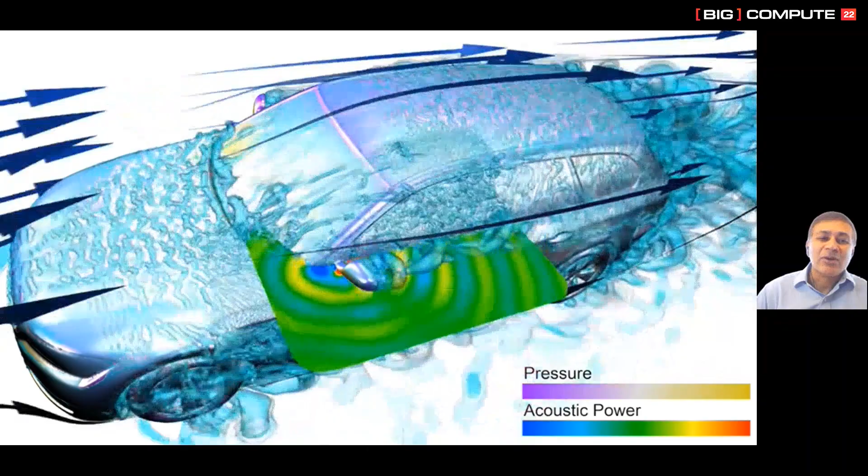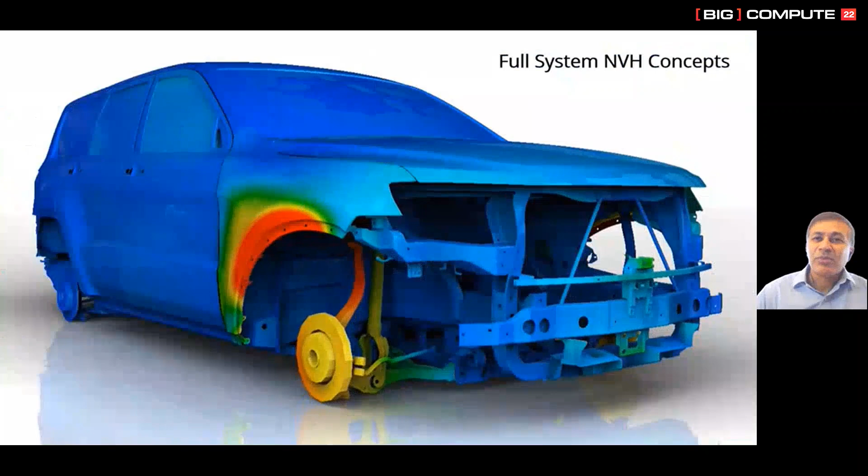Most organizations have already embarked on a journey where they are using CAE for designing their products and making sure those products will function well as intended, meaning from a product durability or performance point of view. They often incorporate multiple complex physics into their simulations. It could be fluids and acoustics, as you see in this case. It could be noise, vibration, and harshness assessments, as you see over here, or thermal fluid flow assessments for thermal runaway avoidance simulations in electric vehicle batteries.

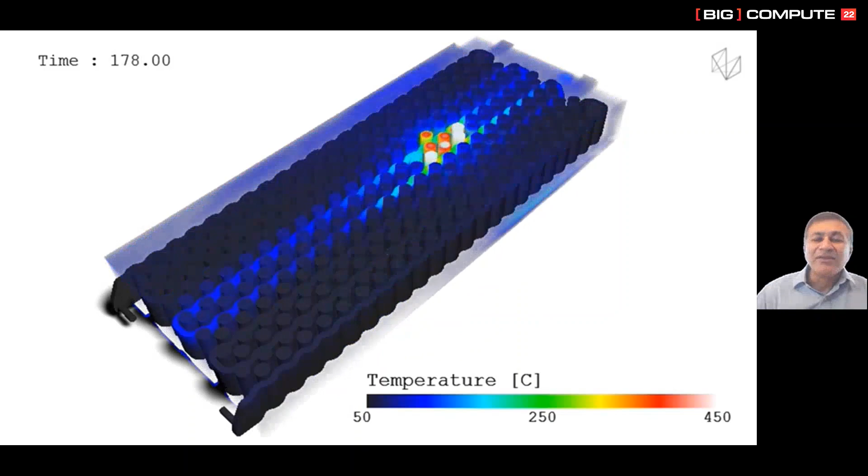I'm sure you're already familiar with many applications of CAE that help people imagine and design better products. In that sense, CAE has come a long way and has had, and is continuing to help develop much better products.

We've also been quite successful in taking advantage of modern computing capabilities and high-performance computing so that we can solve even more challenging problems that might require more sophisticated modeling. This might simply be large models or longer duration events or adding more physics. In this example, this problem involves about 230 million elements and almost 200,000 cores.

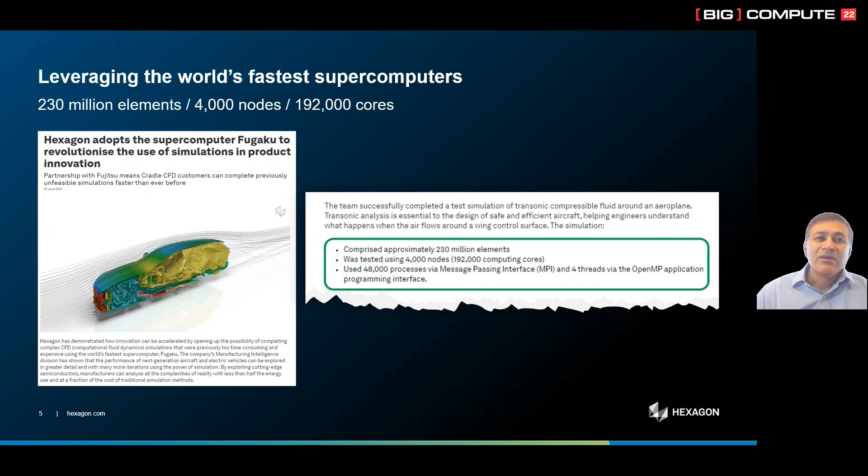In this next example shown here, you can see the speed up we are able to get by leveraging GPUs in this case. So about a 5x speed up in this acoustic application. So pretty good overall, I would say.

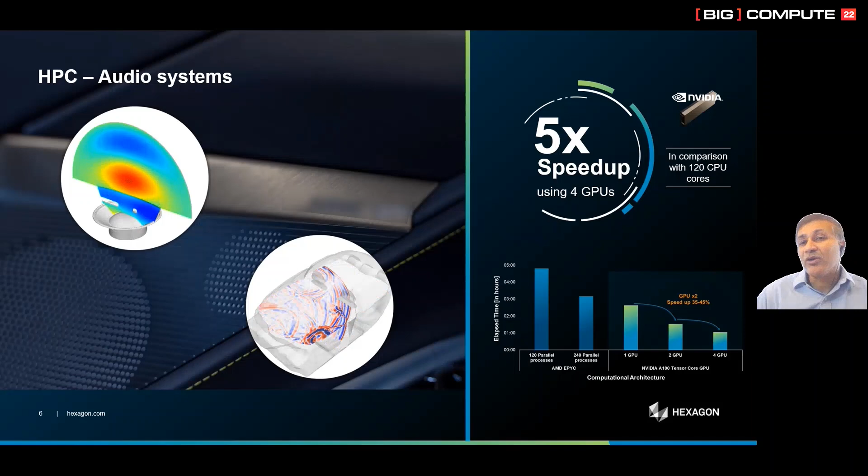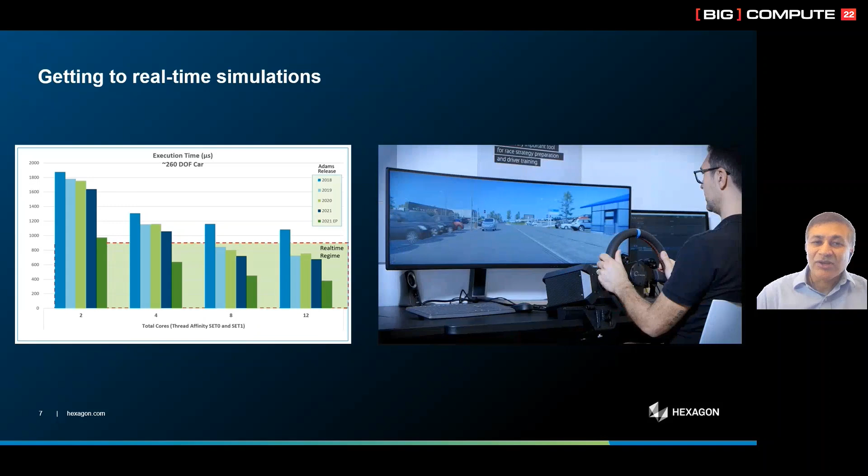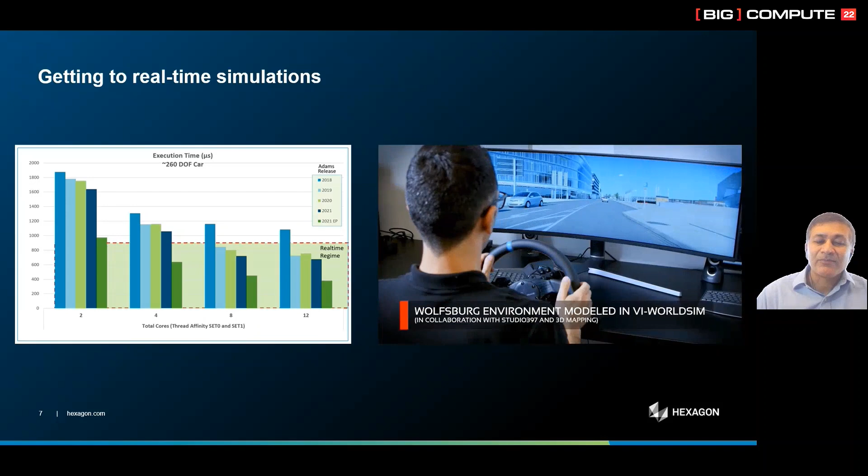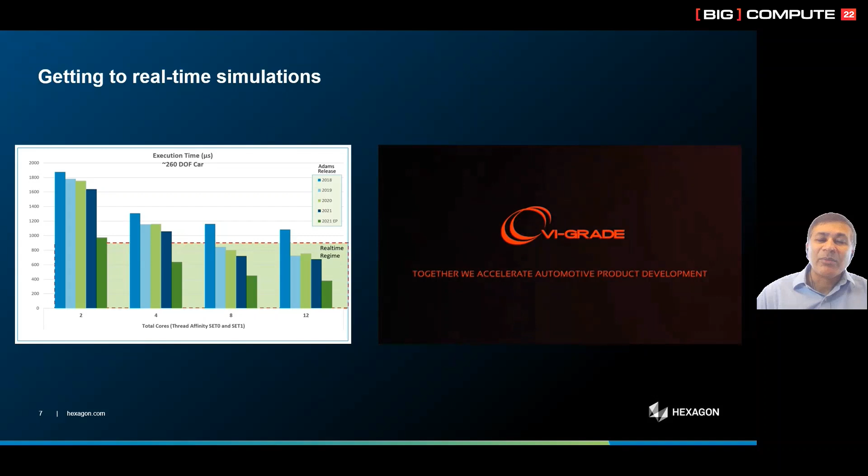In fact, we have reached a point where we can take advantage of modern computational algorithms and implementation schemes to get to real-time simulations, where accurate physics-based models can provide real-time guidance on how a product or system is going to behave. This enables the use of simulation-based models within various machines. And this is a point I will come back to in a bit, especially in the context of manufacturing. In this example, you're seeing Adams RT multi-body simulations being used within a driving simulator in a realistic driving environment to evaluate ride handling and comfort.

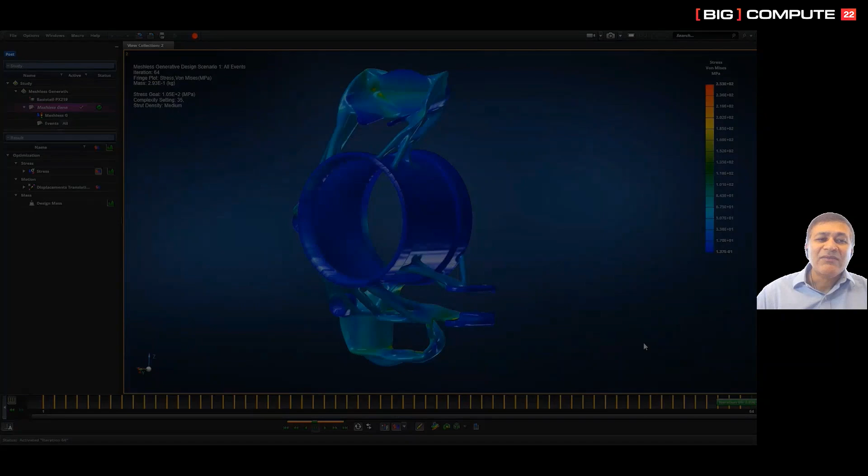More recently, we have seen widespread adoption of generative design concepts to help develop designs that may not be intuitive, but can be really effective in meeting functional and other criteria, such as weight reduction. And even in this case, we've been able to take advantage of modern processors to significantly reduce design iteration times.

So the point is that CAE has been very useful in helping various companies and multiple industries develop far better designs, make better choices on everything from material selection to deciding what performance characteristics matter most, and basically help come up with better products. And we are able to do all of that faster and much more efficiently thanks to high-performance computing. In the future, you'll continue to see improvements here and for us to obtain greater value from simulations with the adoption of techniques such as AI ML to improve the product development and product design processes.

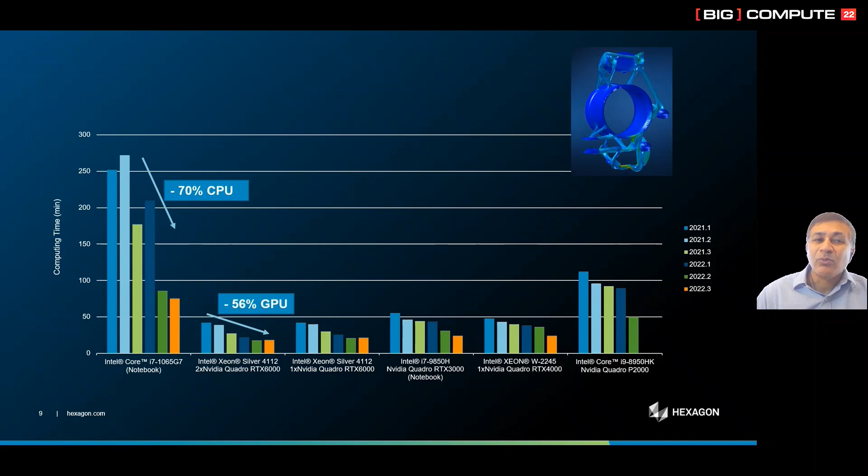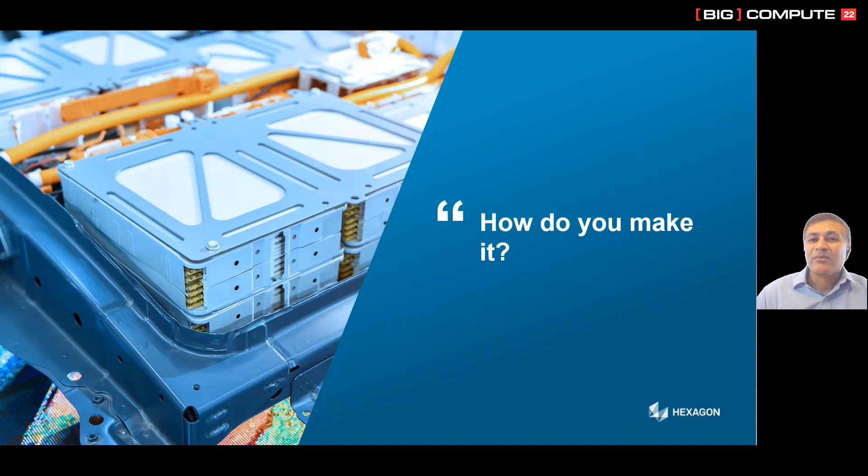What I'd like to do now is pivot to a different topic. What can you do when you have to leverage CAE even more and come up with a much better application of CAE once you have a great design? Can we do more with simulations? Basically, can we answer questions such as what you see on the slide? Can you make the product that you thought you wanted to make? How do you make it? Can you make it fast enough? Can you make it within budget? Can you make it with the quality expected?

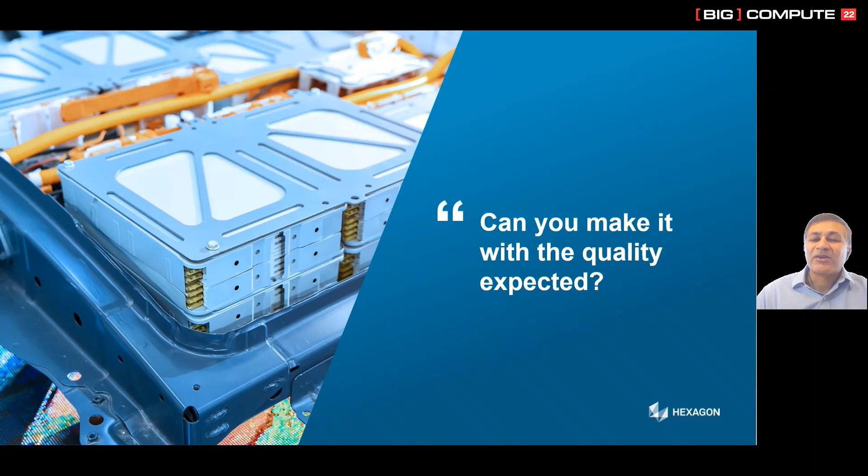How can you be confident that the products as designed can actually be made to address all of the product requirements? Now, it could be performance, life, or other characteristics, as well as meet other business requirements like cost, quality, and sustainability. How confident are you that you're making progress towards zero prototyping?

These questions require us to go beyond concepts like design for manufacturing and requires us to take advantage of simulations beyond the traditional product design and development space and into the manufacturing space. The essential idea is that our software and other simulation software already help design products that will function well as intended, whether it's life or performance. But we don't need to stop there, and we shouldn't stop there.

We can help select and evaluate the best manufacturing sequences appropriate for a given product. It could be forming, cutting, welding, additive manufacturing, etc., a lot of which we can simulate with our software today. But we can go beyond that to tie together much more closely design and engineering, production, and metrology by leveraging paradigms such as AI, cloud, data integration, and workflow management.

For example, once you have confidence that products can be made properly, because you've evaluated it via virtual manufacturing simulations, we can then continue the journey by providing simulation-based guidance during the actual manufacturing to adjust process parameters, such as speed, temperatures, and so on, on the fly based on measurements so that the products still come out as intended, or to flag situations where manufacturing needs to be stopped for corrections.

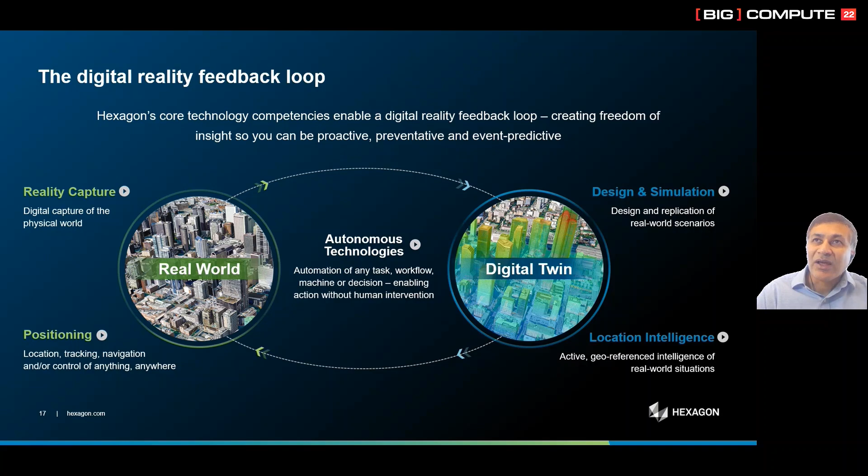Now, in order to realize this promise and potential, there is one key piece that needs to be considered: measuring what's happening in the real world, and not just living in the simulation or the virtual world. This connection in both directions between the real and the digital worlds is essential to realize the promise of smart manufacturing, and is at the center of what we do at Hexagon, not only for manufacturing, but to provide autonomous systems in various application areas, and to realize what we call smart digital realities.

So what are smart digital realities? Smart digital realities are real-time 3D digital worlds that are data-rich and autonomously intelligent. They're made possible by integrating sensor and software systems that connect customers on a one-on-one basis in a precise manner to 3D replicas of physical workplaces, objects, and processes.

Smart digital reality is what allows us to move industry beyond automation to autonomy, providing the ability for systems to act independent of human interaction. So smart manufacturing is a manifestation of the smart digital reality when it's applied to the manufacturing space.

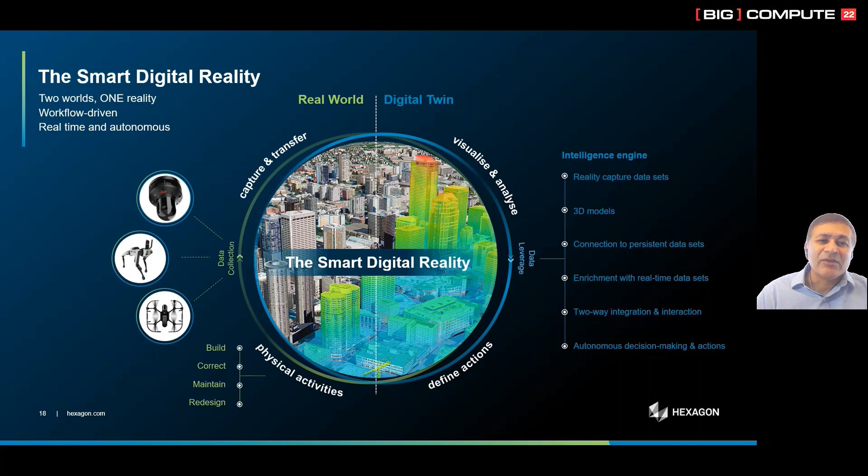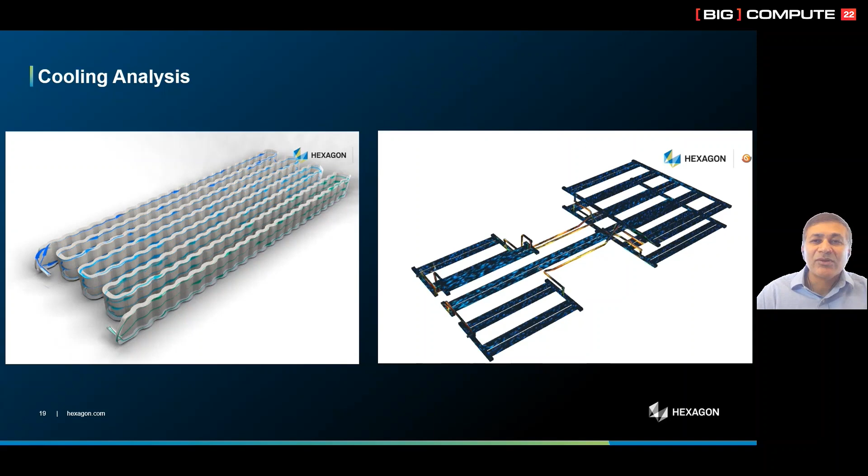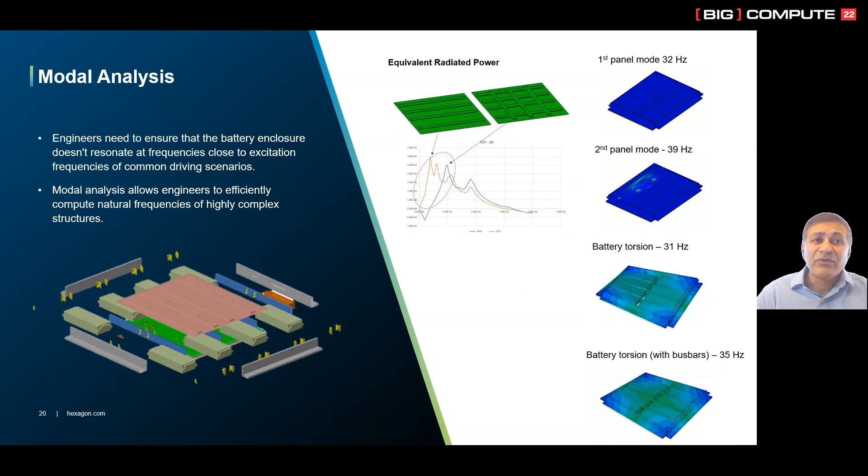Let's take a quick look at what all of this means using some examples. Consider the design and manufacturing of electric vehicle batteries. First of all, as we discussed at the beginning, we already can use simulations to design better batteries. These could be for battery cooling systems, as you see on the slide, or for modal analysis to prevent structural or other noise-related challenges, or for fatigue analysis and assessments to ensure adequate life of the product, and so on.

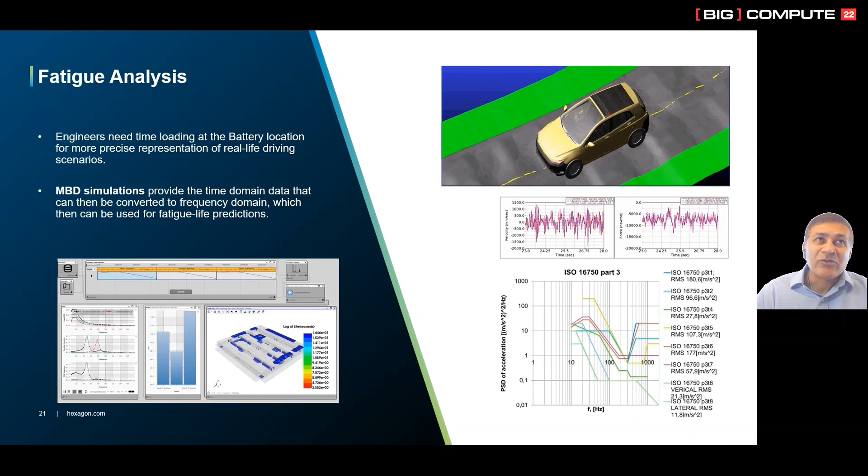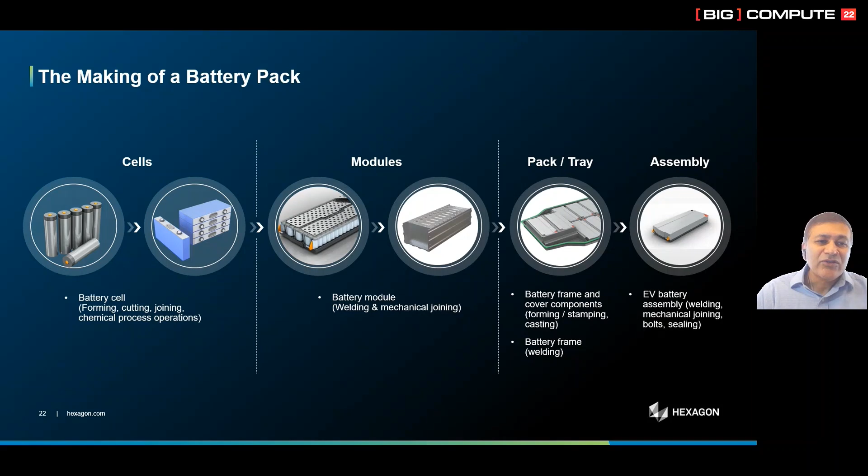We can also assess how to make various parts of an EV battery and how they're going to come together. So in the case of a battery pack, the battery is composed of cells, modules, and of course it requires a battery pack and a tray that are assembled together. So in addition to making these individual parts of the EV battery pack, you can see in this short video that we also need to consider assembly.

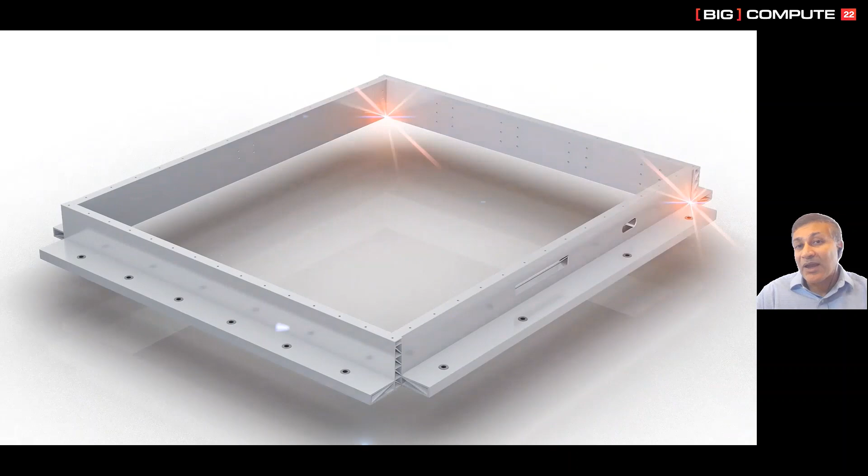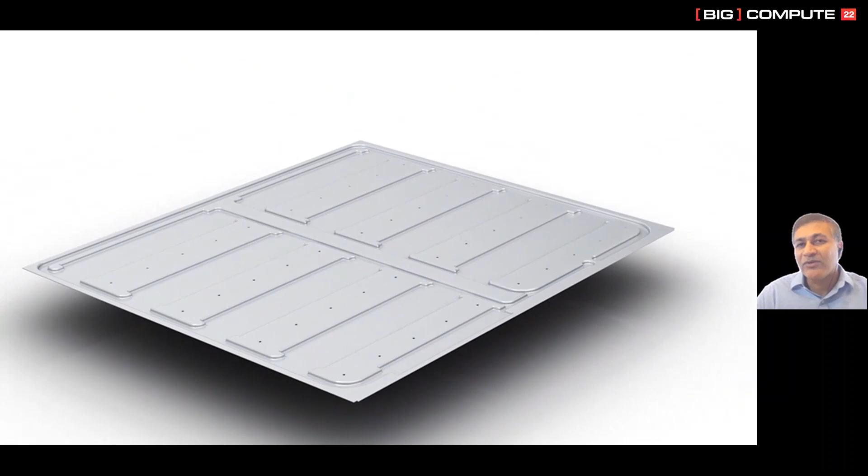That involves various types of mechanical fastening, gluing, welding, and other types of connection mechanisms. So I'll just let the video play for a few more seconds so that you get a sense of how many different types of connections and assembly mechanisms are used in the assembly of an electric vehicle battery pack.

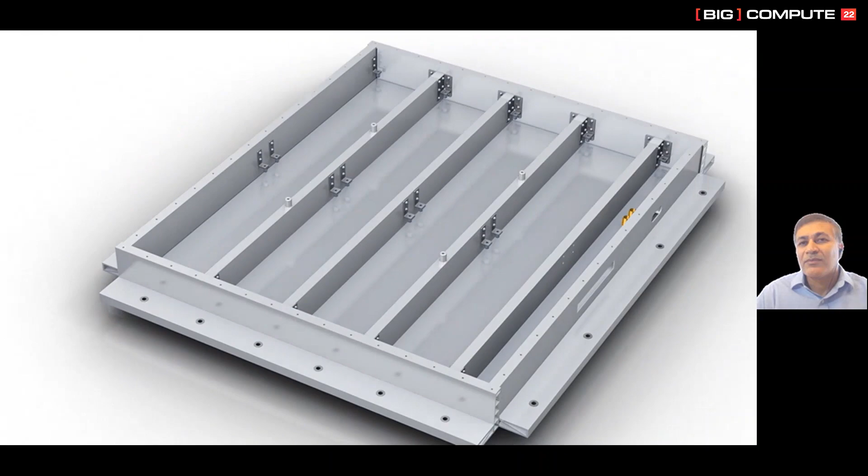So that takes us into the world of virtual manufacturing, where we are able to simulate in detail how various parts of the battery would be manufactured, and which methods are used, and what the process parameters would be to ensure that the final product quality would be good.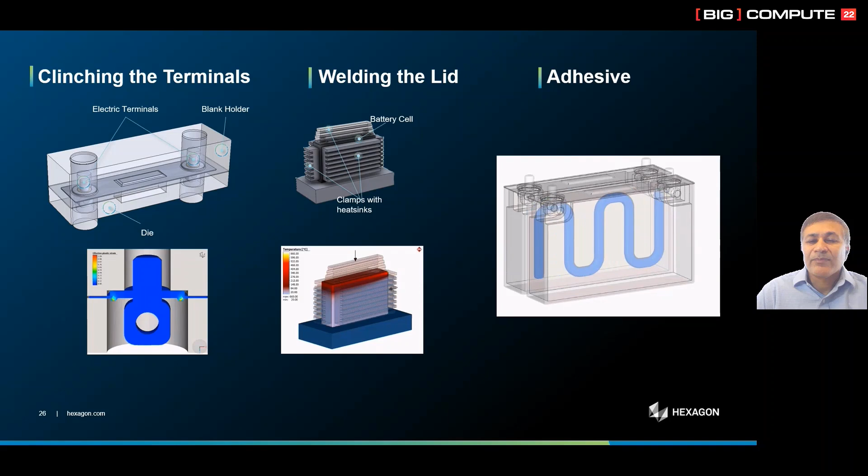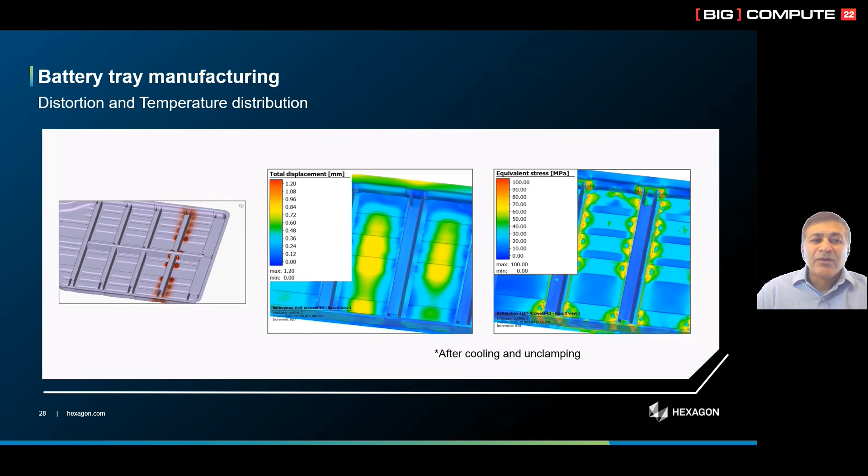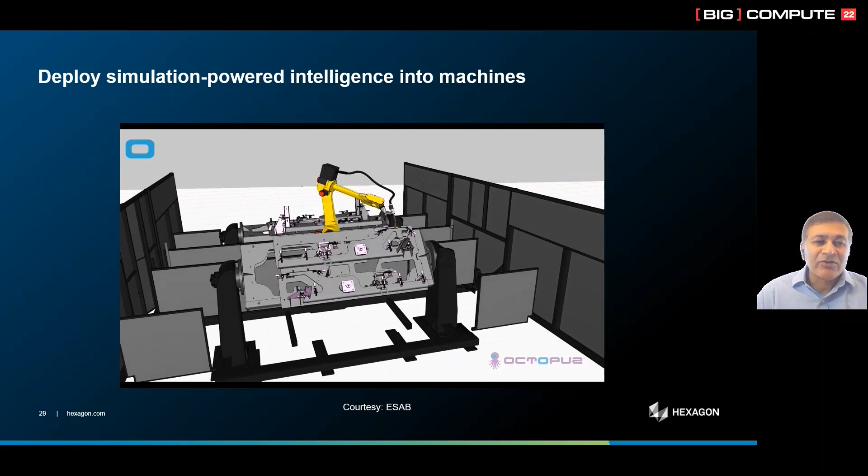Now let's move from the virtual world to the real world. In the virtual world, as we have seen, we can use simulations to design the battery and its various parts, and we've also used simulation to virtually manufacture the various parts to assemble it.

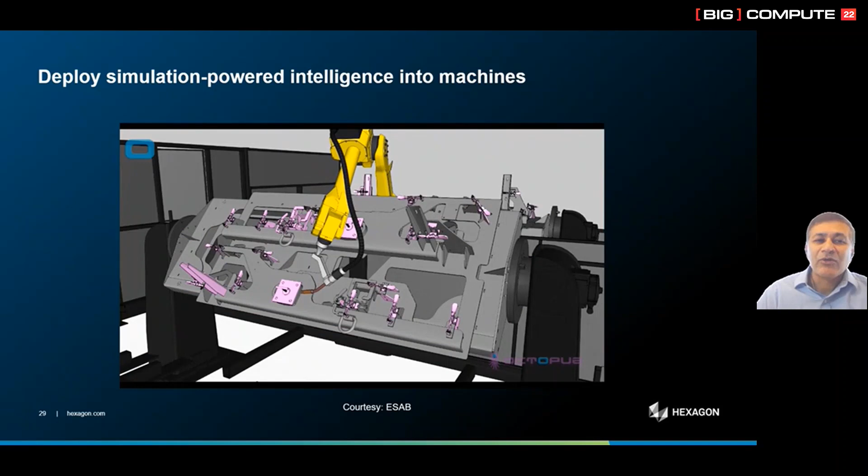Now, what does that mean in the real world? This is where things get really exciting. We can take the process parameters for welding, for example, from simulations—could be weld speed, temperatures, and so on—and use that information to program modern automated robotic welding machines, such as the one you see here from ESAB.

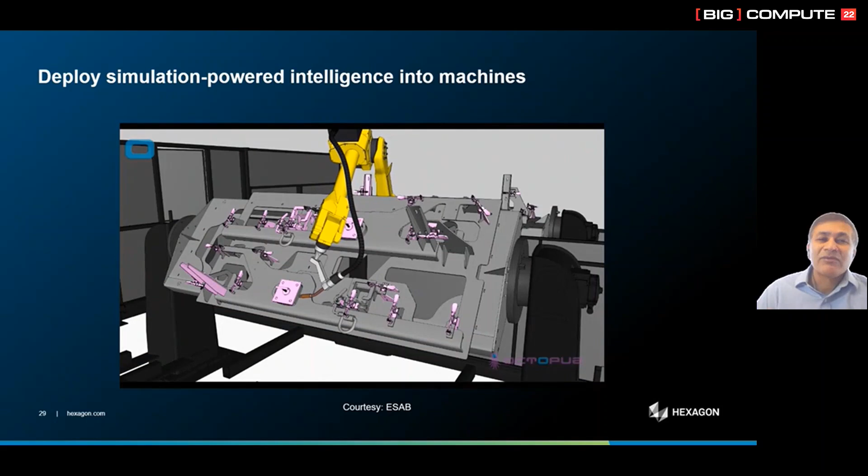Not only that, we can embed simulation-powered intelligence derived via AI/ML techniques into the machines so that if process parameters differ from ideal conditions—for example, if parts or fixtures are warped or if the torches are bent—the machine can still make adjustments autonomously, which is a big step forward towards smart manufacturing.

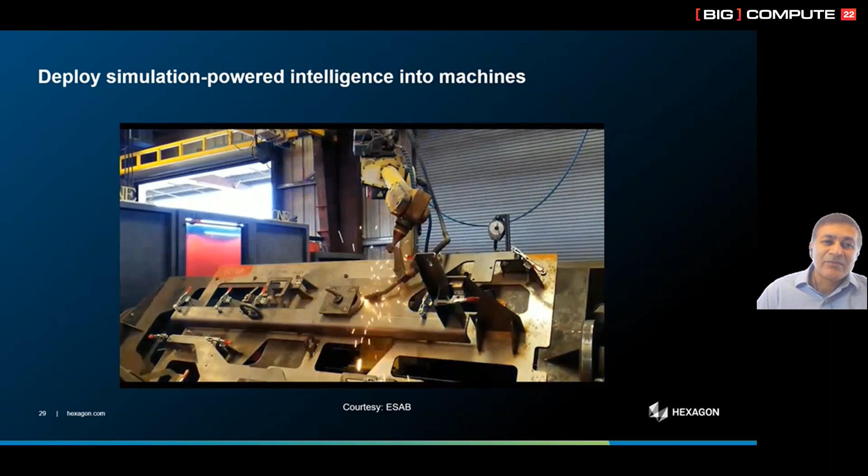In some EV batteries, there are hundreds of cells per module and over several thousand cells in many modules. That results in tens of thousands of welds in the assembly. So even at 99.9% or higher weld quality, safety and range could be compromised.

So welds must be studied and tested for higher quality in production. In other words, both precision in manufacturing and precision in inspections are paramount. So in the real world, as manufacturing is proceeding, we still need to measure what is being manufactured so that adjustments can be made as soon as possible.

Are the dimensions correct? Are there microstructural defects? Is delamination happening? And so on.

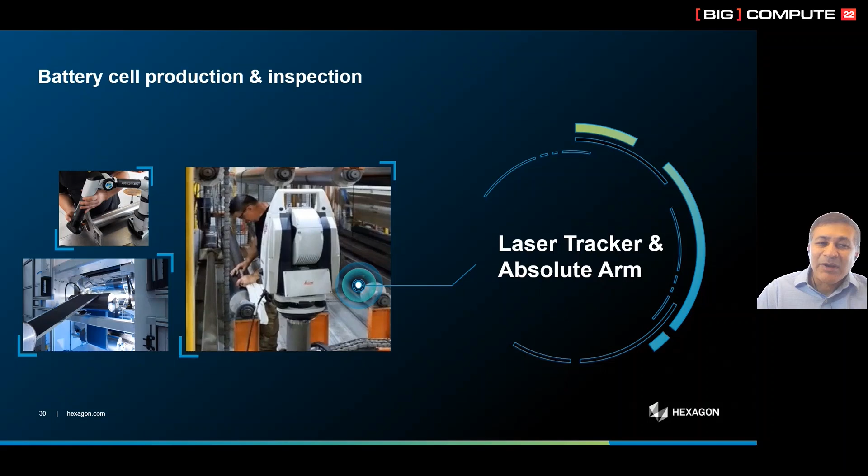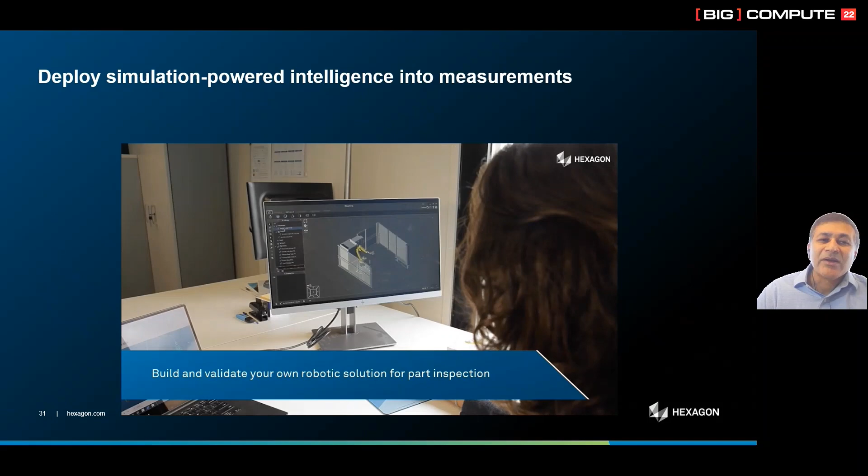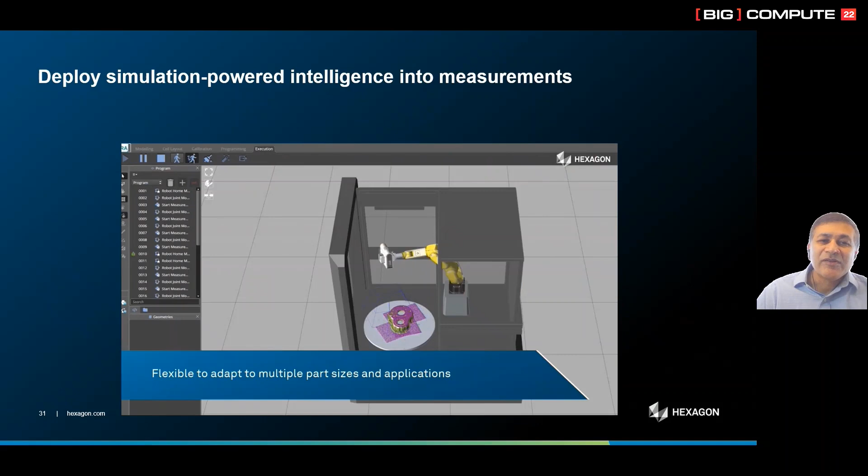And just as we saw with the welding machines, here again simulation can play a valuable role by providing guidance into what are the most important quantities that need to be measured, where they need to be measured, and how often. Measurement routines can be planned based on geometry, but also based on guidance from simulations so that the scanning routines can be optimized.

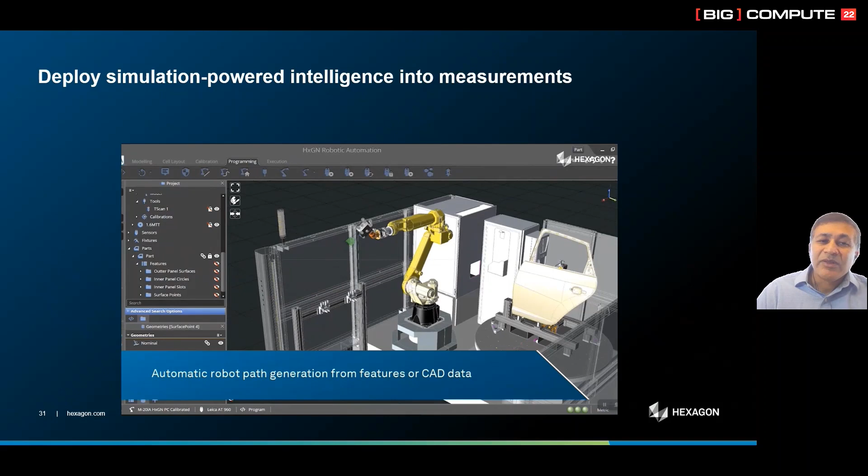Finally, the output from these measurements can be compared to nominal quantities for key decisions to be made. Let's take some more examples of what measurements can tell us about the quality of battery parts as they're being made. This is an example of optical measurements of wrinkles in pouch cells.

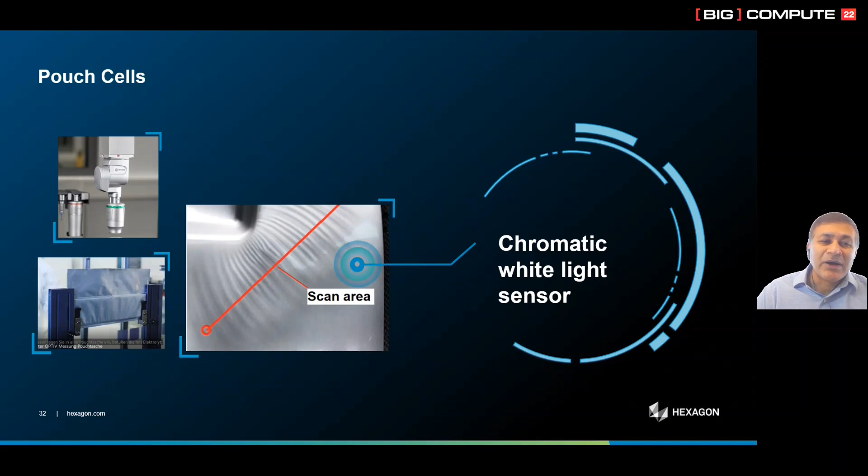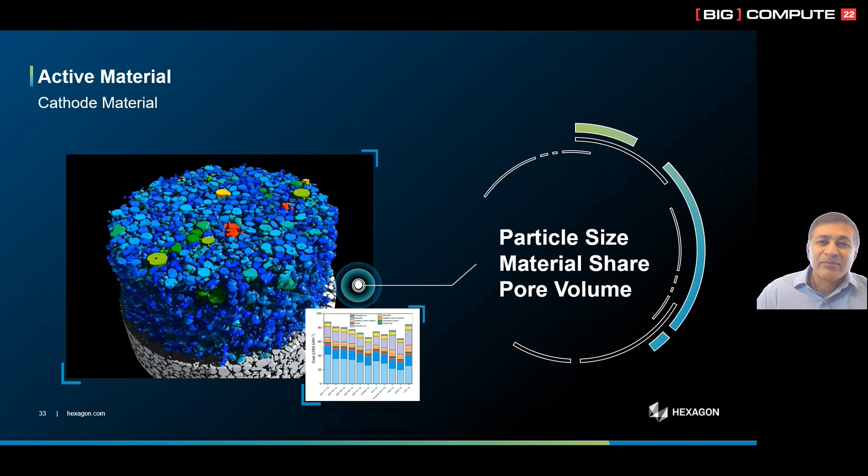Switching to CT scans, we're able to look inside some of the battery parts, such as the cathode, for porosity, particle size, and other details. Or we could look at inclusions in a jelly roll, delamination, porosity effects, and so on.

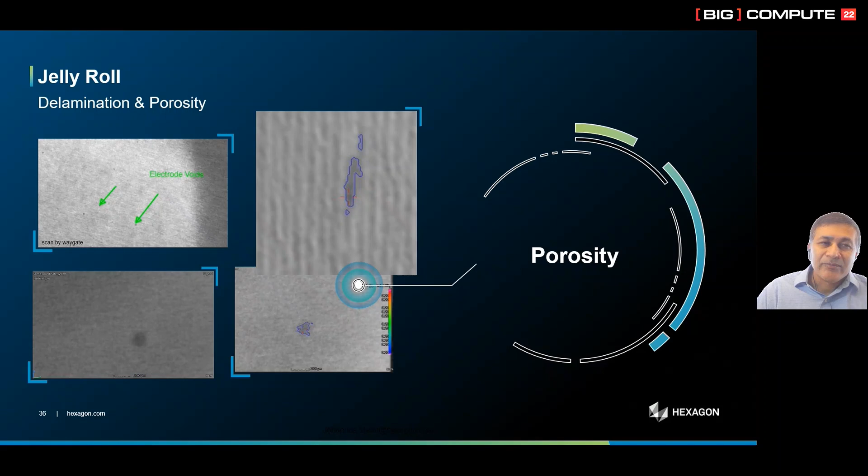So what do we do with these measurements in the real world? This could be dimensional measurements or microstructural measurements or other characteristics. Well, first of all, wherever possible, we could use those measurements—if they're happening during manufacturing—to adjust the manufacturing process parameters, guided again by simulation-based intelligence so that product quality is not compromised.

We can also use those measurements to understand the behavior of the as-manufactured product for reality-based simulations, but of course also for other analytical assessments using various quality and statistical methods applied to numerous measurements being made.

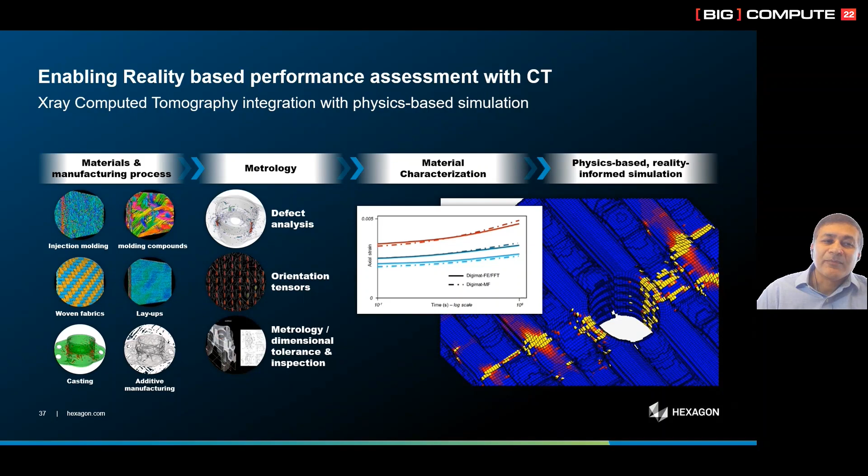So to conclude, we need to go beyond the traditional use of simulations in design and development of products in order to help realize the potential that smart manufacturing offers. The use of virtual manufacturing simulations will enable earlier decisions on the manufacturability of various product designs and provide greater confidence in the progress towards zero prototypes.

The use of simulation-based intelligence within manufacturing and measurement machines will also ensure that an appropriate degree of autonomy and self-correction is available during manufacturing, to accommodate what happens in the real world without compromising on product quality. All of this is essential to enable autonomous and smart manufacturing. So simulation will play a key role in our journey from where we are today towards our destination of smart manufacturing. Thank you.